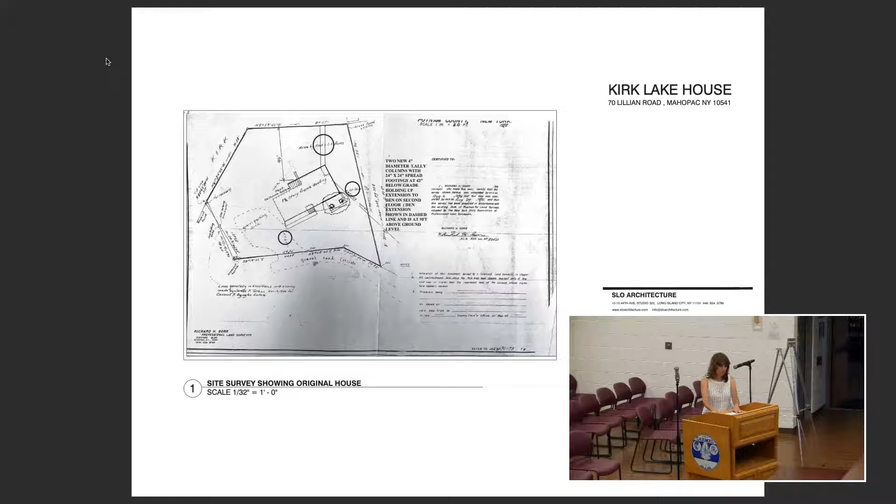Okay, so it's 140 square feet. You gave me a rain garden over here to the left, added in 2011 for the deck. Oh, actually I don't have a rain garden calculation on this drawing. Well, so what are we gonna do - the way I was thinking about it was the 2 columns, just the 2 columns, but you actually have the roof touching, and that's impervious, so you have to do something with the water.

Right, okay, so we have 140 square feet. We're already adding a larger rain garden for the other work we're doing, but I don't have the other file in front of me. I don't have the previous application you submitted for approval, so right now I only see a 50 square foot rain garden, and then we added 25 square feet.

It's possible that's a total of 75 square feet actually. But if I look at the house that you added - and I'm assuming the new work you're doing is this yellow? No, not at all. I know the little deck you want is 140 square feet, whatever that is. Oh, the deck is from 2011.

So this deck has nothing to do with anything regarding the rain garden. Okay, but so the original job, the job that's going on right now, what are you doing? That we're currently doing? Yes. Okay, I'll show you.

We added this corner to the house, and we added these columns here. Just the columns? Yes. But is there a roof on the columns? Yeah. Okay, that's what we have the permit for already, and this corner.

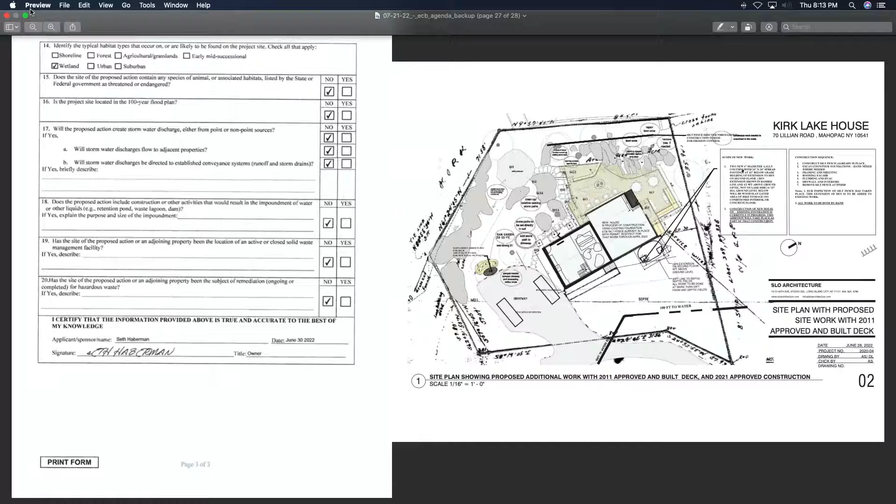So when you added that corner and those columns, I'm gonna assume it has a roof overhang to it. Right? Since this rain garden has not been expanded since 2011, what I'm trying to look for is the math for that little corner, the 140-foot extension, and the 2 columns. I need to see what am I doing to that 75-square-foot rain garden.

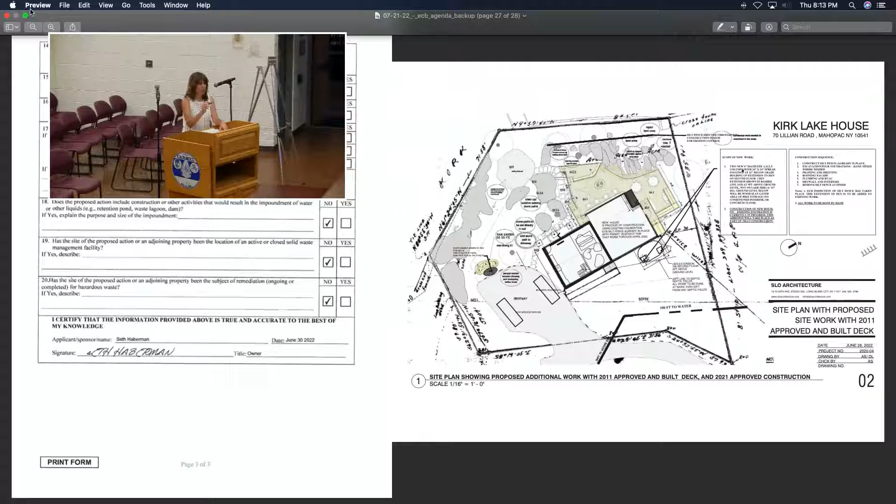Right, so it's a 50-square-foot rain garden, and I can get back to you on how much we added, whether we added 25. You may have asked me to add 50 at the time, and if that's what's approved. For 2011? No, for this one, for 2021, the one for the corner permit we have, yes.

I have a permit that's in use right now. Does that expire anytime soon? April 2023. When do you recall coming before us for that permit? Was it in the last few years?

Do you know when that was? I should have had that information for you before I came. Rose may have given it to us, hold on. Yeah, she has. I extended this through 2023. Okay, let's see what we did here.

I feel like Indiana Jones. Where's my...

Okay, so you added an additional 50 square feet of concrete to existing foundation, 3 5x5 columns. And now you're adding on these 2 columns. It looks like the 3 5x5 columns were already added on the last permit.

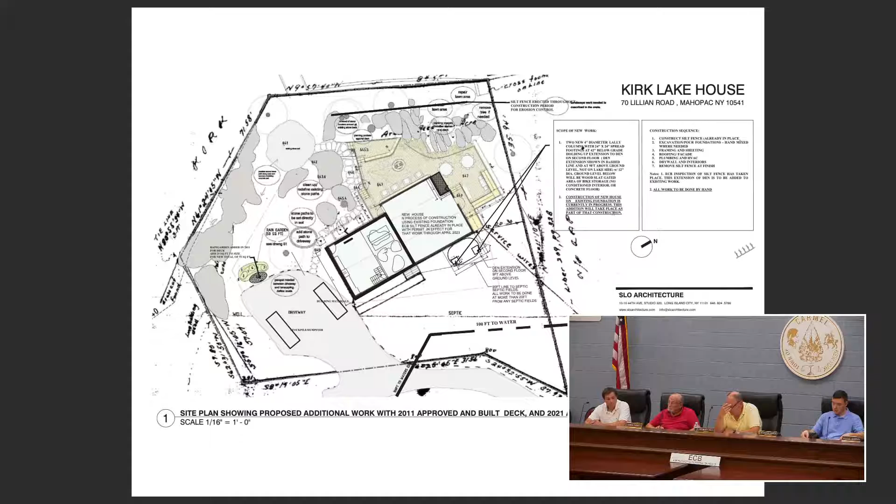Do you know, are you going to be running a leader down and let it go to grade there? Is that what's gonna happen, or are you tying into anything existing with the water? So where's that gutter gonna put its water?

Basically, it's the same amount of water. What's gonna happen is we currently have a gutter going across the house, and now that will be diverted because that edge of the roof will no longer be the edge. It'll go a little further down.

Lower, yes. Right. Okay, so even so, you'll have to tie that in as the leader on the other side. I assume then that this whole side is currently guttered and you're gonna be having it going around this whole thing somehow.

This is what I'd like to do: show me where you're gonna put the water, where you're gonna put the rain garden for this little area. So you have a little work to do. You gotta show the dimensions on the drawing. We have no machines on here. Just show location of rain garden.

You're gonna have to get the rain garden, I mean, it's 140 square feet, it's gonna be minimal. I know it's minimal. If you tacked on another 20 feet to this thing, not even 15 feet onto your rain garden, how much would it cover?

Yeah, what? I just wanna know where it- Just tack this onto here. Yeah, that's what I'm saying. I'm fine with adding a little bit more onto here.

I just wanted to make sure that we know where the water is being discharged to, right? It's gonna be discharged over here. That's what, it's just gonna come over here, water's gonna be over here. Or the right side of the house, depending on where he puts the leaders. Probably on the right side more than anything.

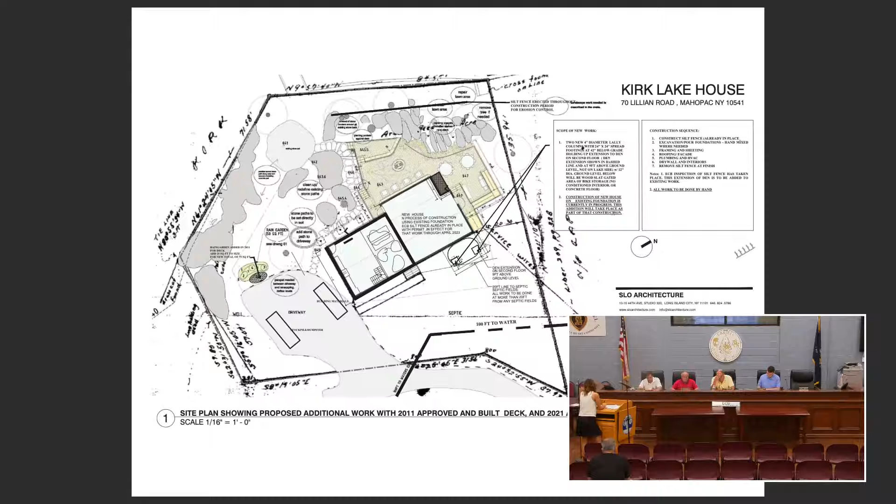Do it by Monday, and let us submit, then resubmit the drawing showing the size of the rain garden, dimensions, and what your plantings are. You can copy what you put in your permit previously for planting and say we're adding more of this. Okay, sounds good. All right, so do I have a motion to accept Seth Haberman's application for 70 Lillian Road to extend the second floor with the following conditions?

One, show dimensions of the existing structure to be added. Note that there are no machines, and provide rain garden calculations and plantings for the new 140 square foot building. Do I have a motion? So moved. Second. All in favor?

Aye. All right, so you're on the clock. If I don't get it Monday, you're off the clock. Good, you'll get it Monday.

I'll send it to Rose, right? Yeah, send it to Rose. And clean up the drawing, lighten up the old stuff so you can barely see it. Whatever, light gray. I don't care. Just lighten up the drawing, bubble the area you're working on, show the rain garden, and give us the calcs.

The calcs have to go to the town engineer for approval. You're not disturbing 140 square feet because you're only doing 12-inch sonotubes. Oh, 24 by 24 sonotubes, so it's just minimal impervious area. That's really what matters, that's okay. I'll send it to Rose. Yeah, send it to Rose. Perfect, thank you.

I had a question, I wasn't clear on the lot numbers. Were they marked somewhere else differently than the deed? Yes. Were those lot numbers marked differently than reflected on the deed? Yes. Was it an error? It could be. If you look at the deed, hold on, what's the name?